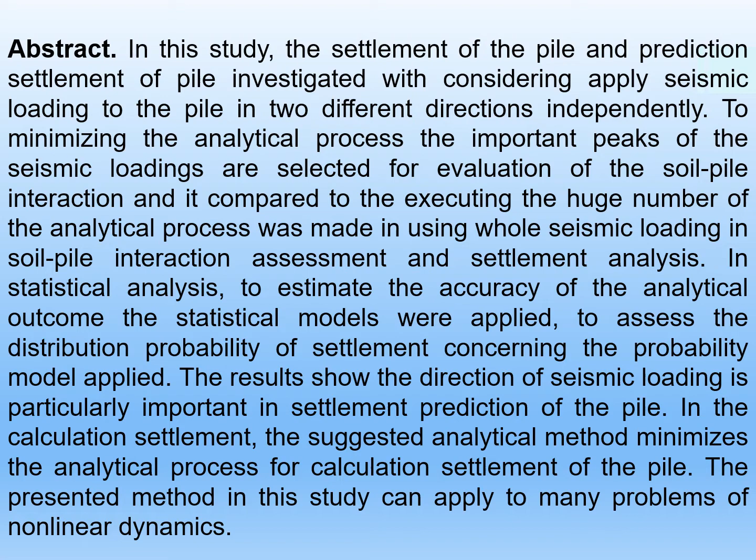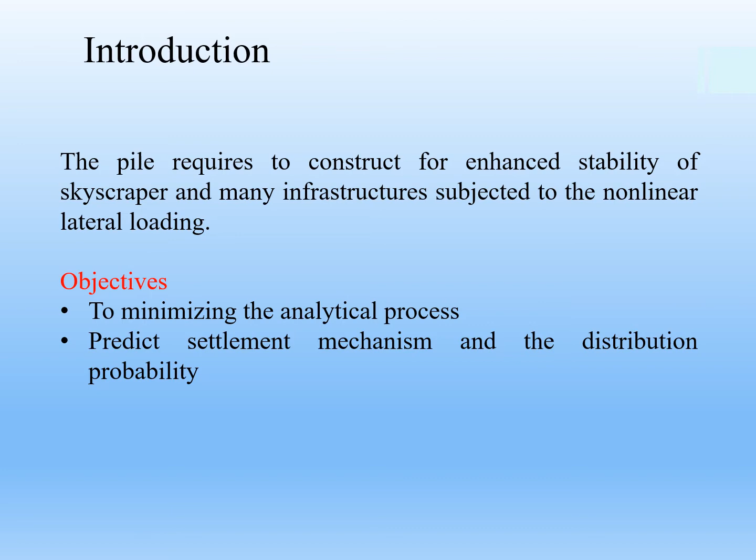Introduction. The pile is required to enhance stability of infrastructure or skyscrapers when they are subjected to nonlinear lateral loading. The main objectives of this investigation are to minimize the analytical process, predict the settlement mechanism, and understand the distribution probability of pile settlement when the pile is subjected to seismic loading.

A brief methodology was used in this investigation. The flowchart starts with modeling, then analysis using a simple formula presented here based on settlement, seismic loading, pile geometry, settlement coefficient and modulus of elasticity of the soil.

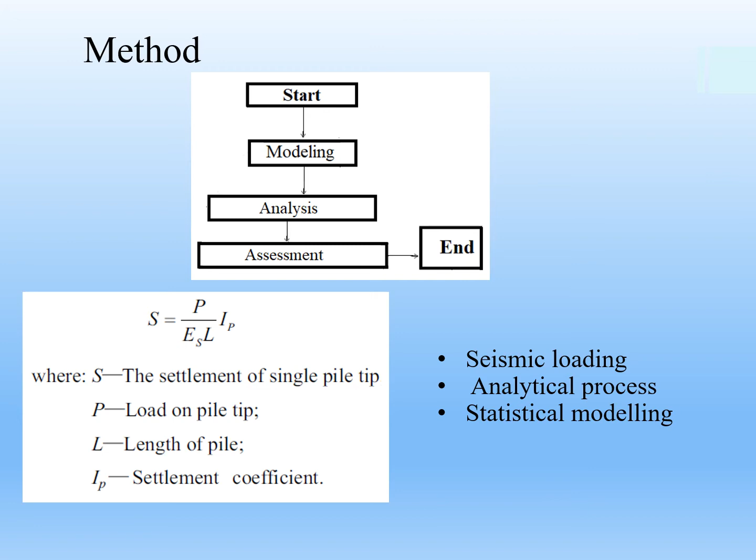Then seismic loading: seismic loading was applied to the pile two times. First, the whole seismic loading recorded from the earthquake station, and second, just the selected peak of seismic loading. Then the analytical process is made, and finally statistical modeling is applied to the results for assessment and verification.

The geometry of the pile is shown in the figure. The pile is 0.3 by 0.3 with a length of 18 meters. The seismic loading is in two directions. One time the whole seismic loading was applied on the pile in each direction, and at the second stage only the peak was selected and applied on the pile for seismic analysis.

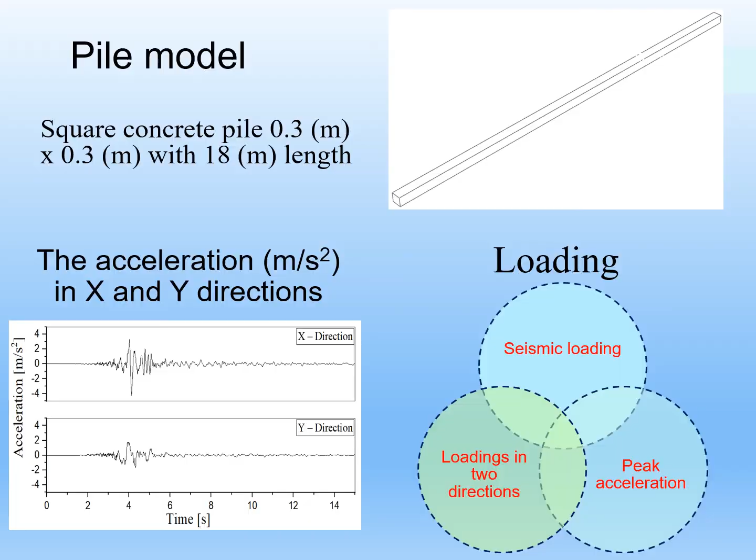Result: the settlement in X direction and Y direction. In X direction, when seismic loading was applied to the pile, the settlement according to whole seismic loading is shown. Then settlement according to peak seismic loading in both directions X and Y. At each one, when we apply the peak of seismic loading to the pile, it shows two different settlements.

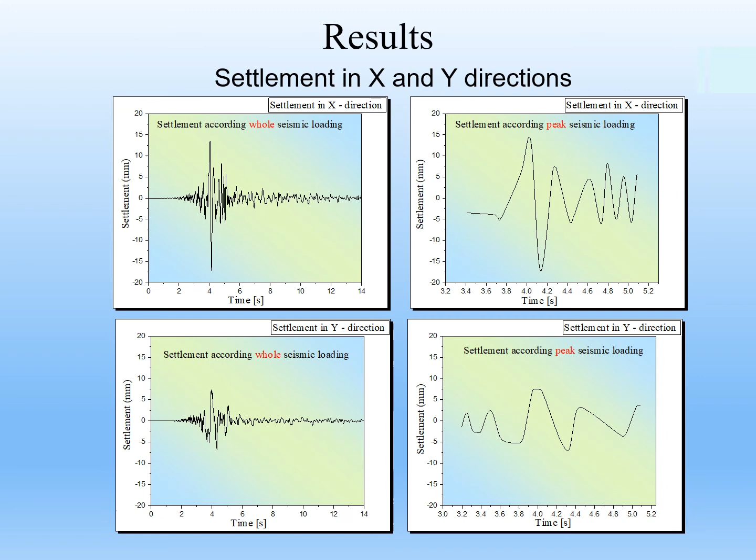Result: the results show the direction of seismic loading is important in settlement prediction of the pile. In calculating settlement, the suggested analytical method minimizes the analytical process for calculation of settlement of the pile.

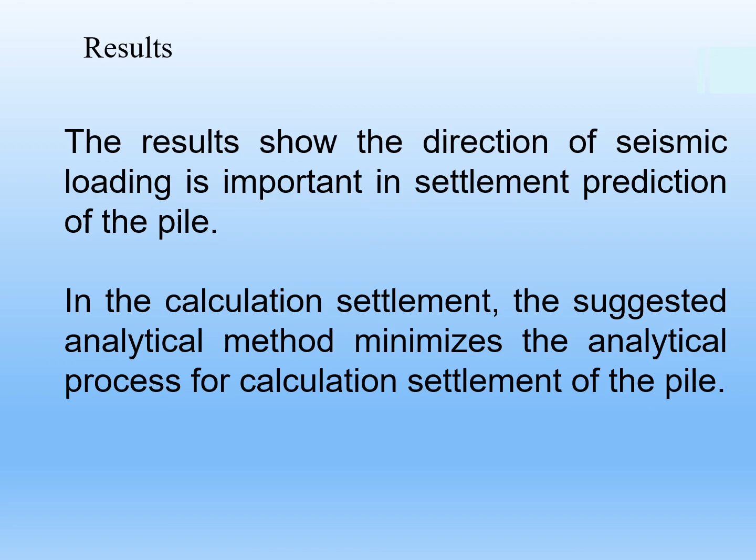Based on the peak seismic loading, two statistical models have been developed here, first for the X direction and second for the Y direction. The red line is the reference line, and lower and upper percentiles of displacement are shown in the picture, and also the expected normal value for displacement. X direction and Y direction show two different settlements, two different mechanisms of settlement.

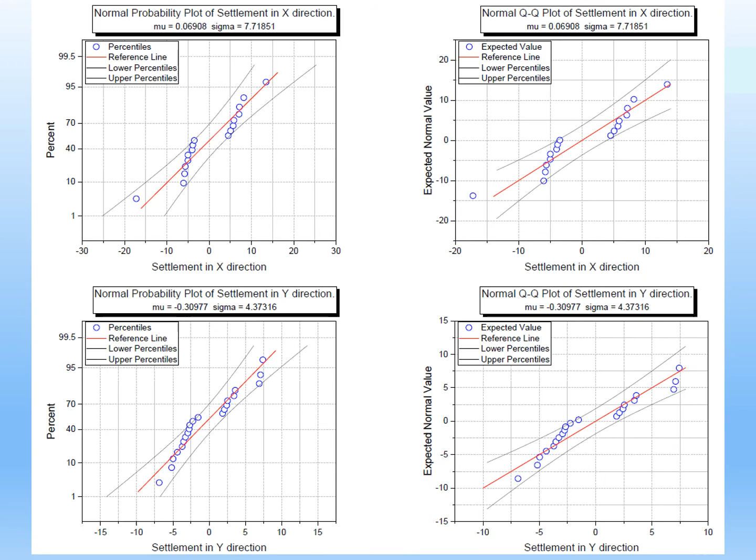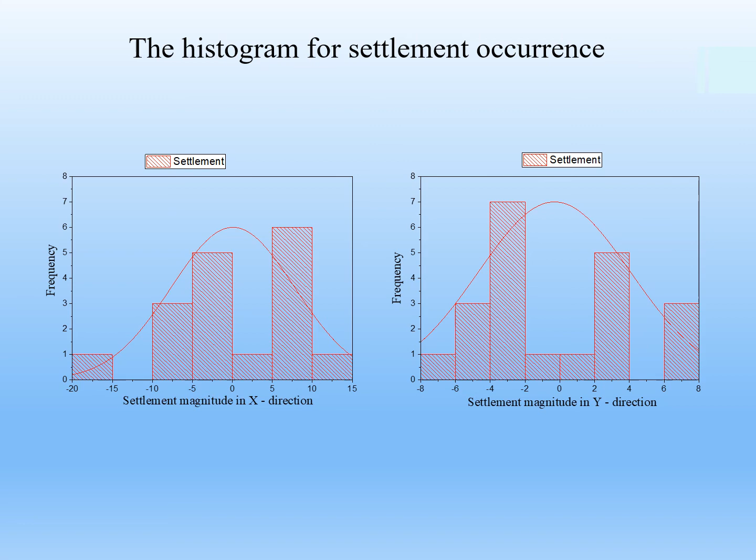Histogram. The histogram is used for understanding frequency of the settlement in X and Y direction. There is no similarity in X and Y direction in terms of seismic settlement. Both cases are nonlinear settlement or differential settlement, but in two different mechanisms.

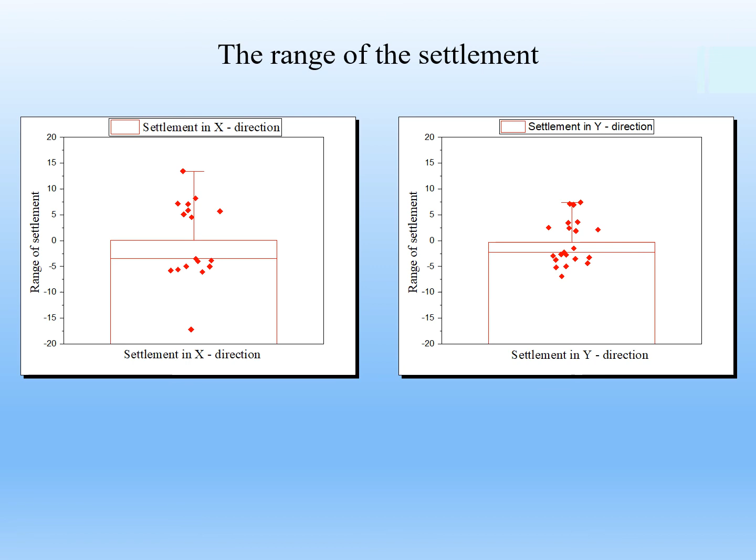The range of the settlement in X direction and the range of settlement in Y direction. Here it shows two different frequencies and magnitudes for the settlement in X and Y direction.

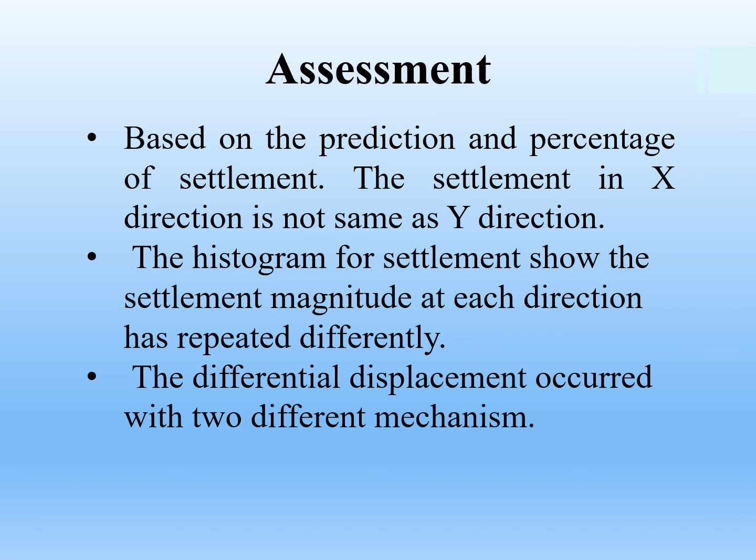Assessment. Based on the prediction and percentage of settlement, the settlement in X direction is not the same as Y direction. The histogram for settlement showed the settlement magnitude in each direction has repeated differently. The differential displacement occurs with two different mechanisms.